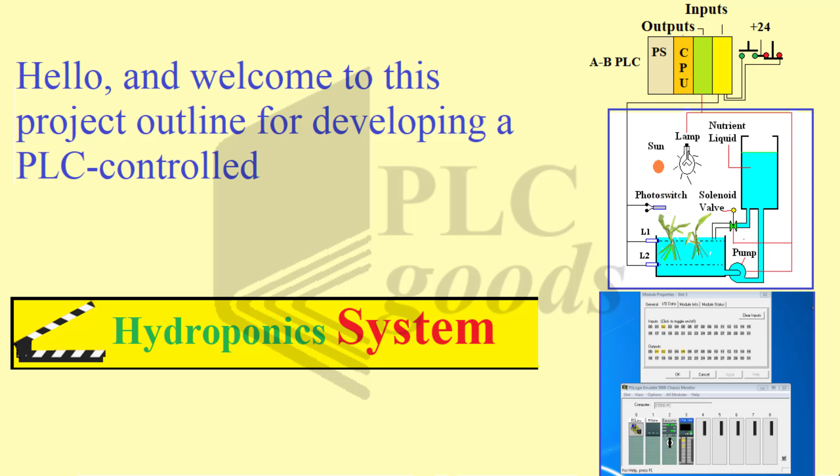Hello and welcome to this project outline for developing a PLC-controlled hydroponics system. In this project, we will design and implement a PLC program to automate the operation of a hydroponics system. The system will function as follows.

When the start button is pressed, a solenoid valve will open to fill the nutrient container. The valve will remain open until the nutrient level reaches the high-level limit switch L1. Once the container is full, the nutrient will remain in the container for 20 seconds.

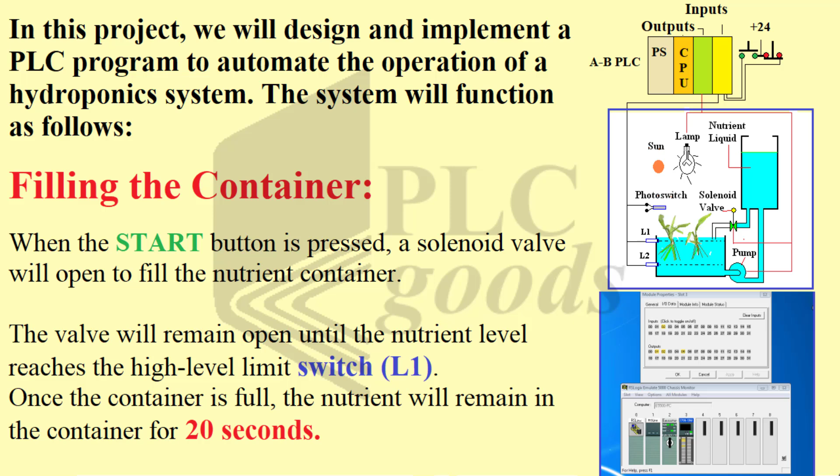Emptying the container. After the 20 seconds nutrient holding period, the pump will activate to empty the container. The pump will continue running until the nutrient level drops to the low-level limit switch L2. The container will remain empty for another 20 seconds before the cycle repeats.

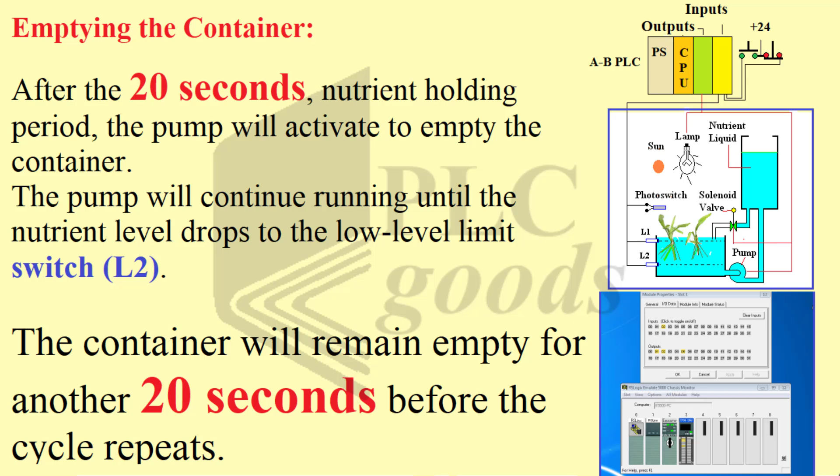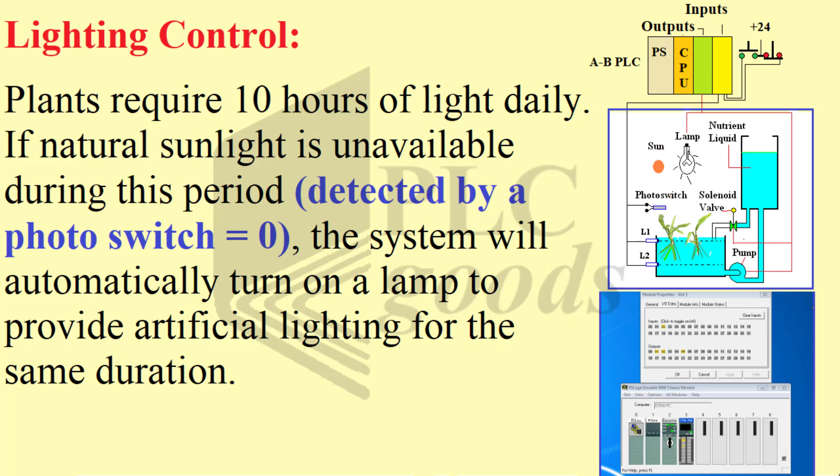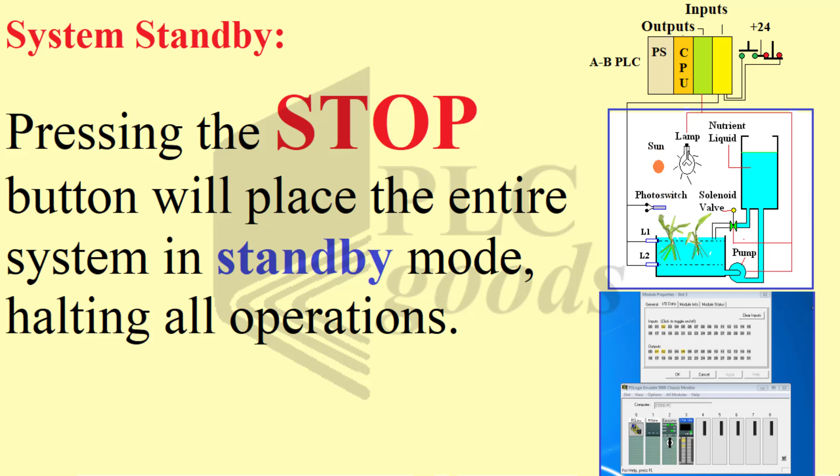Lighting control. Plants require 10 hours of light daily. If natural sunlight is unavailable during this period, detected by the photo switch, the system will automatically turn on a lamp to provide artificial lighting for the same duration. System standby. Pressing the stop button will place the entire system in a standby mode, halting all operations.

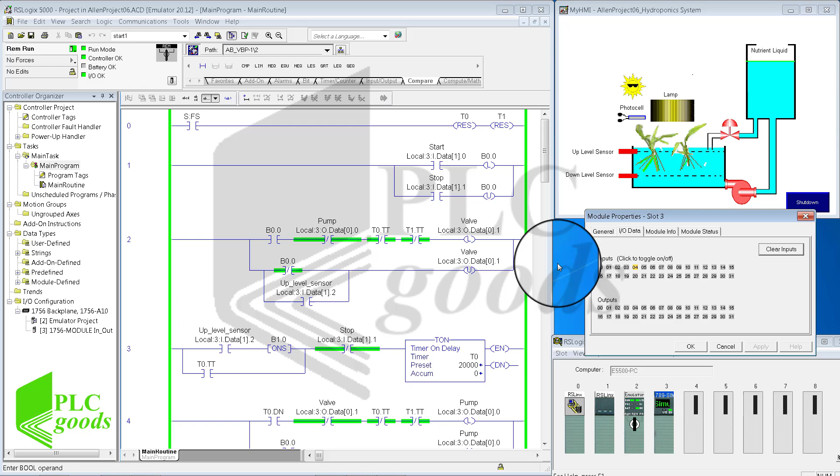Now let's go through the pre-written ladder relay control program for the project and see how it meets the project's requirements. The program consists of 8 networks. Let's walk through the process step by step. Starting the program. Notice that to initiate the system, I press the start button.

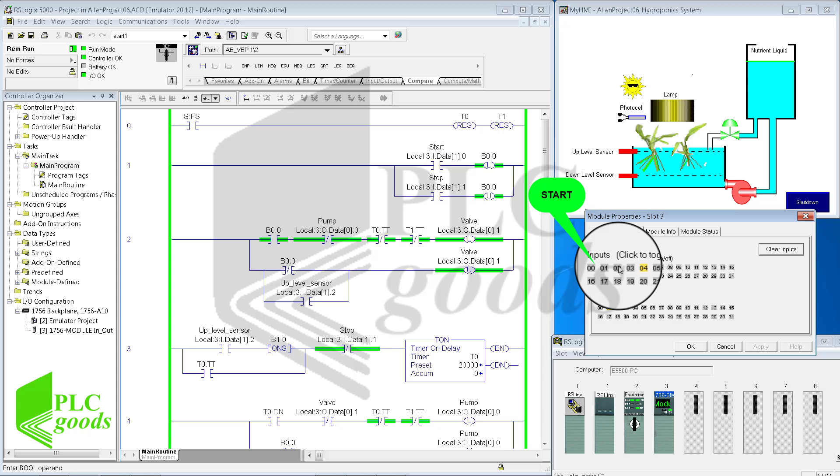The valve opens and allows nutrients to fill the container. The low-level limit switch L2 and the high-level limit switch L1 must be activated. So I go ahead, activate these two. The container will take approximately 20 seconds to fill up.

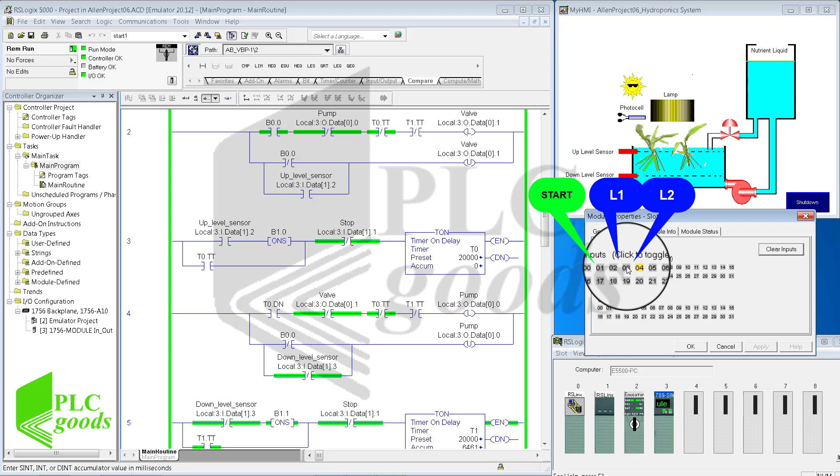After that, the pump activates to empty the nutrient solution. The pump is on, so I go ahead and deactivate L1 and then L2, and now the container is empty. The container will remain empty for another 20 seconds before the cycle repeats. Notice that the next cycle started by turning the valve on.

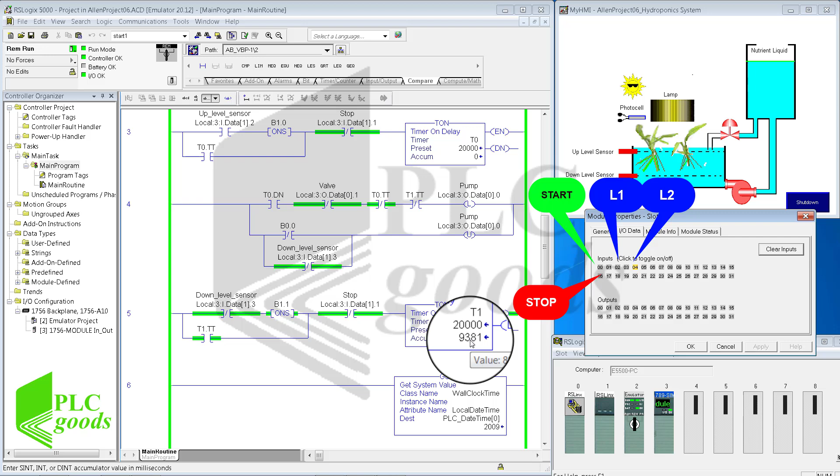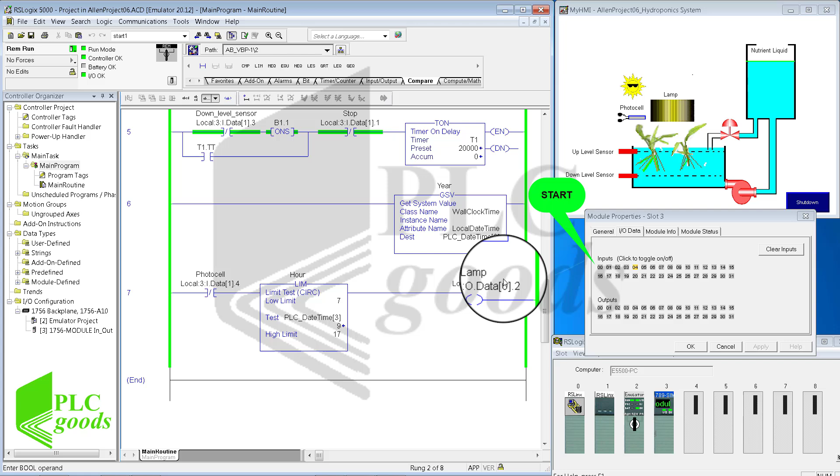Pressing the stop button will place the entire system in a standby mode, halting all operations. Plants require 10 hours of light daily. So if natural sunlight is unavailable during this period, detected by the photo switch, the system will automatically turn on a lamp to provide artificial lighting for the same duration.

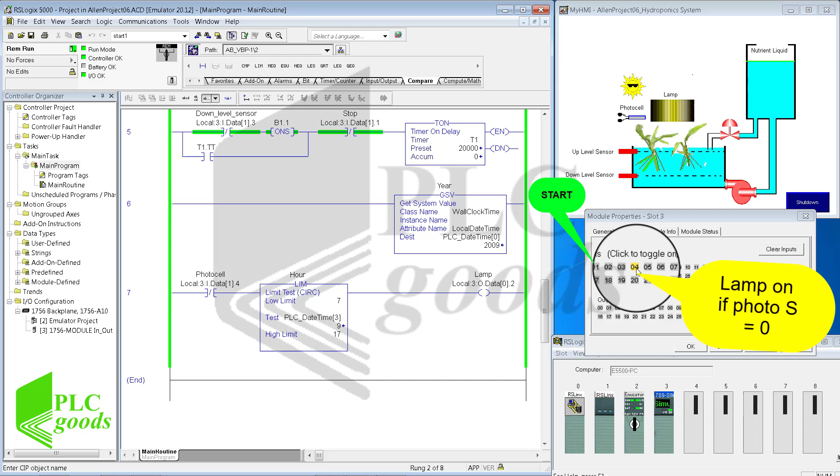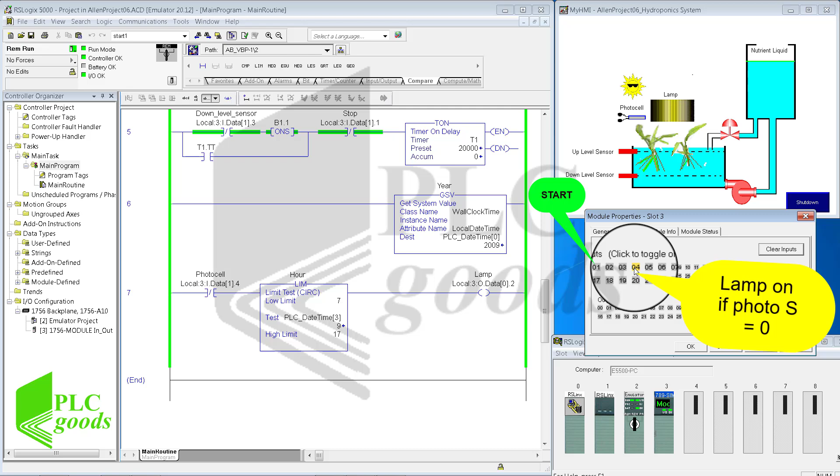So notice that when I deactivate the photo switch, make it 0, the lamp turns on. And reactivating I04 turns the lamp off. It means that sunlight is available. The project is successfully tested on a virtual Allen Bradley PLC.